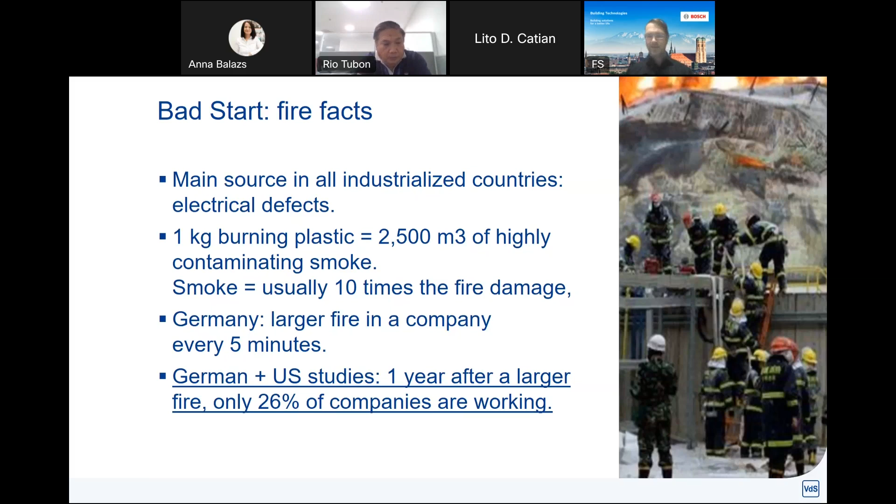Okay, we've had the bad facts. We will now also continue bad facts, but we might also say fun facts. I guess we all have read about the studies.

How are people reacting to a fire alarm? When a siren goes off, not the voice alarm, you are expecting everybody to panic and run out of the building. But the standard reaction is to do absolutely nothing. And after a while, the people say, hey, turn off this damn annoying noise. Where's that noise coming from?

And we have a nice example here of even the reaction of technicians to fire detection and alarm systems. This is a Moscow mall, or this was a Moscow mall.

In the year 2018, the fire alarm is going off, and the technician on duty says, hey, this fire detection alarm system, why is this damn annoying thing beeping and blinking at me? He's checking the cameras, of course, seeing nothing because the fire detection alarm system is working right, is going off at a very early stage.

And he says, stop this damn beeping, blinking. He turns off the fire detection alarm system. And you can see the outcome in this nice picture.

So let's say enough of these horror statistics. Please give us some good news. I do.

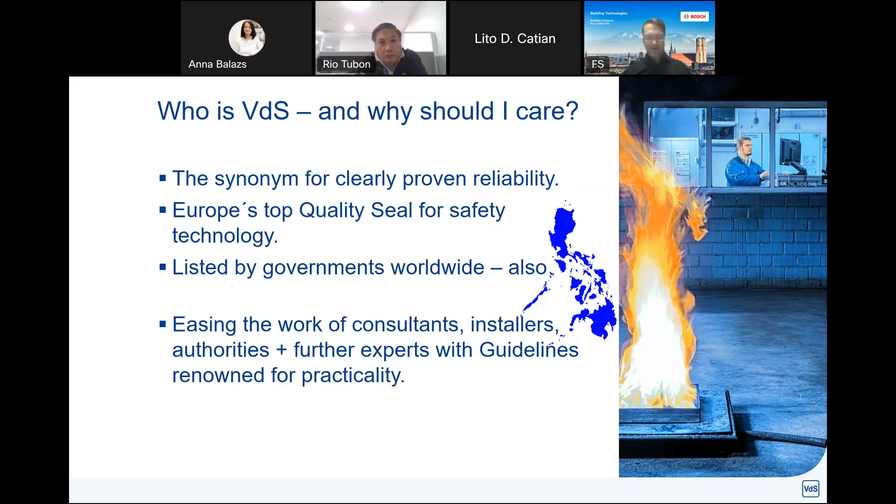You can say, okay, sounds good, but please give us some detail, give us proof. How can we be sure that VDS safely protects us? Because we are -- I have to read this because I like the slang -- evidencing supreme reliability by practical endurance specifications.

Same as, for example, Underwriters Laboratories or FM Global. The testing is subdivided into two main parts: functional testing and environmental testing.

Products and systems have to prove that they are effective at all times after artificial aging under a wide range of difficult environmental conditions, using artificial aerosols, using real fire tests, and for extinguishing systems, even in exact replicas of the planned extinguishing environment.

Basically, our job is to heavily mistreat the safety systems and then make sure if they still function. All this so you can see directly at first sight, this has VDS on it. This will save human lives and entire companies when I need it, long term, and also under any, even the toughest environmental conditions.

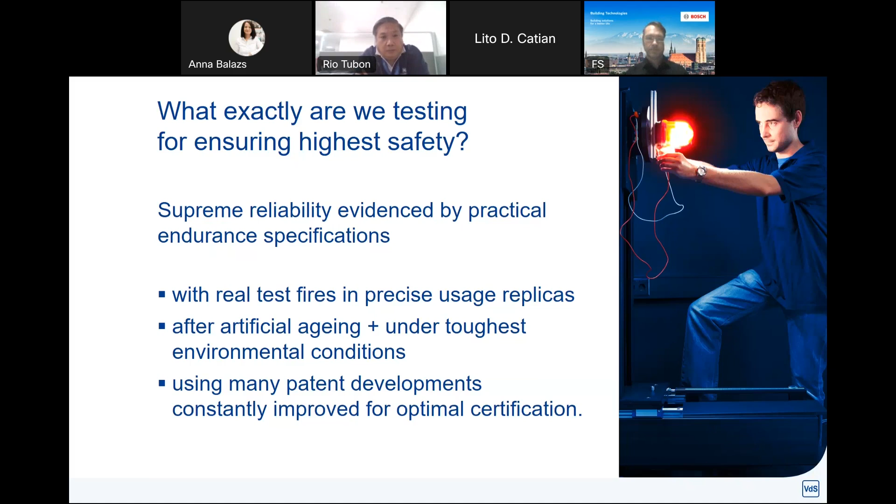We have two core points here on this slide, directly underlined for you, because there is a frequent situation that our partners, consultants, planners, installers report to us again and again. They are to install a fire protection system somewhere, and the authorities require compliance with ISO or EN standards. Then maybe the operator states, we are part of an American corporation, so our fire alarm technology must comply with NFPA requirements. And then the insurance company demands the system must be installed according to VDS guidelines. When this happens, those responsible, mostly you fine listeners, usually ask themselves the important question, why me?

Hopefully we can make your work much easier here. The VDS approved products like those of Bosch comply at all times with European standards, almost always with ISO specifications. And VDS approved products can always be used in installations according to NFPA 72. Also, if some of you are doing gas according to 2001, for this you will get written proof directly after the presentation. So with VDS, you are directly covering all relevant standards from one single source. Done.

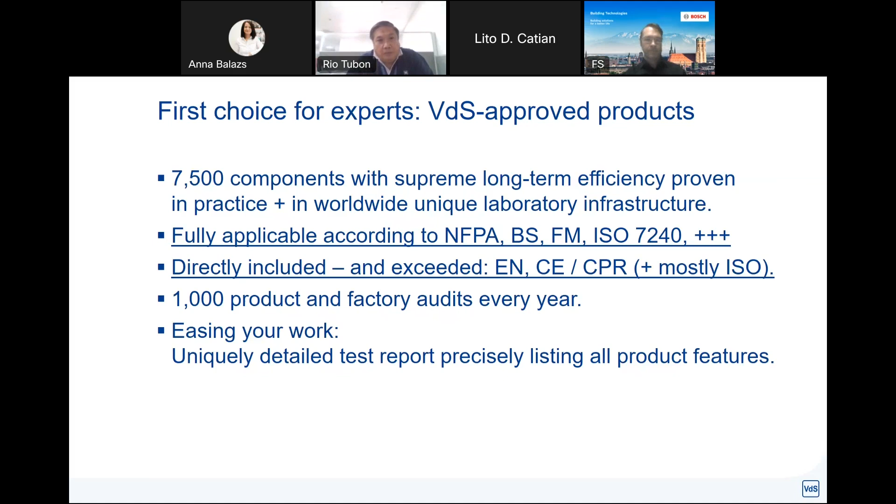VDS bases on the European norms, so I'll give you some background. In most countries, authorities, just like the company owners we talked about on the first slide, say, fire? What the heck is fire? You probably know this nice song, Fire, what the heck is fire? If they act like this, sooner or later a huge catastrophe is bound to happen, which in our European case was a fire at a mall in Brussels with 251 dead in the year 1967.

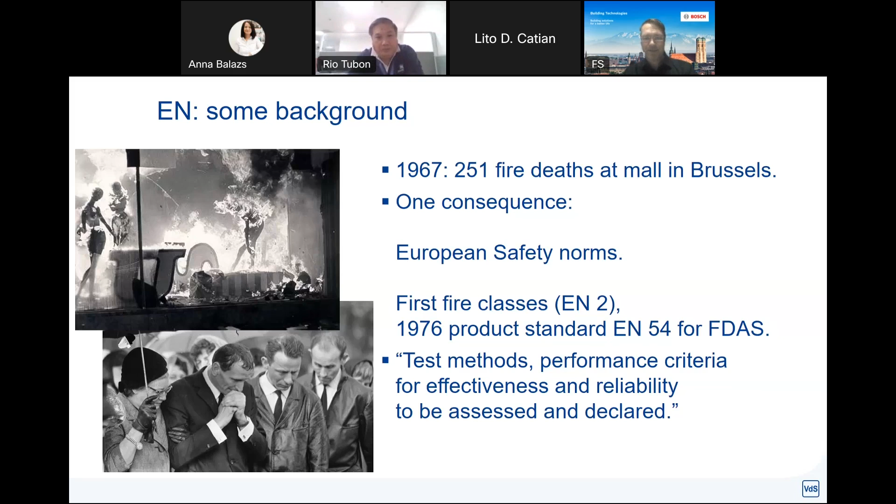After such heavy catastrophes, there's pressure from public opinion and media on the politicians, saying do something. So they had experts create safety norms, like our EN54 standards for fire detection and alarm systems, with test methods and performance criteria for effectiveness and reliability to be assessed and declared. This is a little overview showing you all the brain power that is going into the European standards.

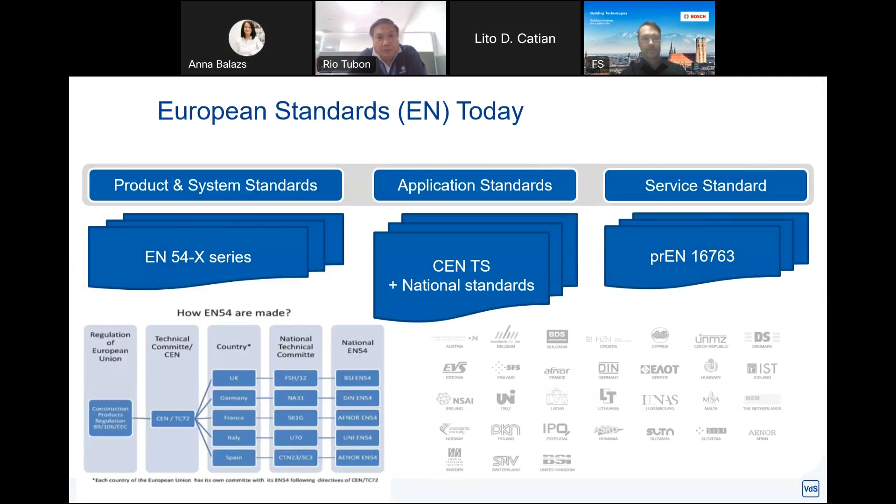Now, an important point, the comparison between the EN and UL standards for fire detection, control, and indicating equipment, CIE. Everybody first seeing this wonders, but I thought these are two totally different standards, why is that almost all the same? Basically, these standards are in constant flux. We have a nice idea, good for safety, the Americans also add that. The Americans have a nice idea, good for your safety, we also add that. Totally fine. This is a copy for global safety.

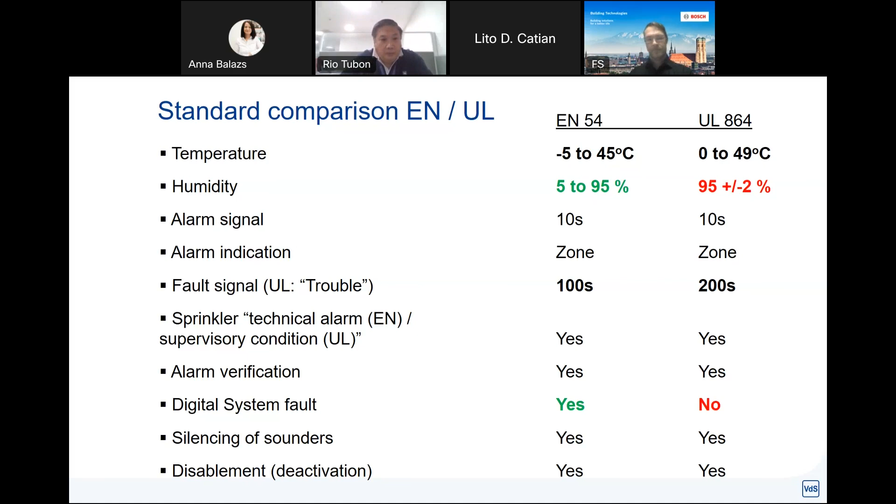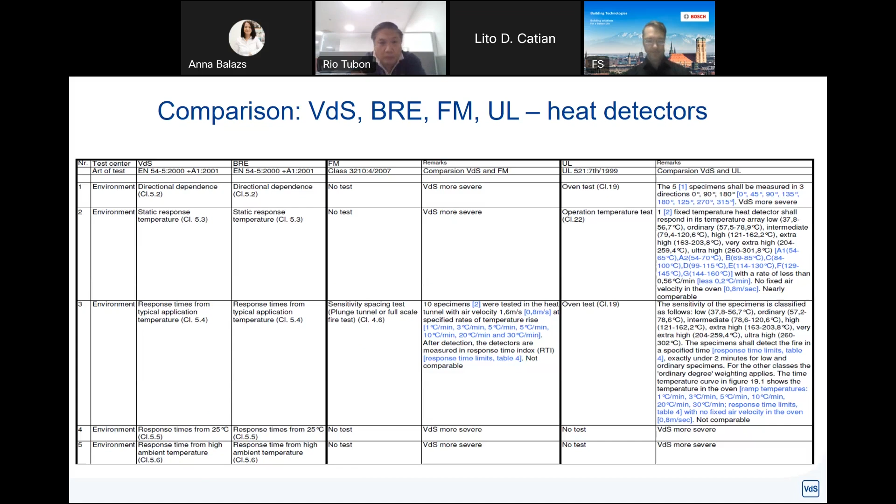Same for the smoke detectors. You see point 2, ingress of foreign bodies. When I first read this, I said, who the heck would want to ingress foreign bodies into smoke detectors? This is mostly insects, and this was one of the main triggers of false alarms in Germany during spring and summer, when loads of insects are flying around. And many Philippine regions always have German spring and summer temperatures.

As we know, the frequent false alarms caused by those reflecting insects make users hate the technology. The intrusion of bugs or other insects can be prevented by a very simple, cheap grid, and I strongly assume that in the next version, UL will reasonably demand this.

Maybe you're also interested in point 4, repeatability. We measure the testing results 6 times in a row to make absolutely sure that the detectors do not just contain a random luck generator, but that they really work. And point 6, we perform all tests with 20 detectors to make sure they all react the same way.

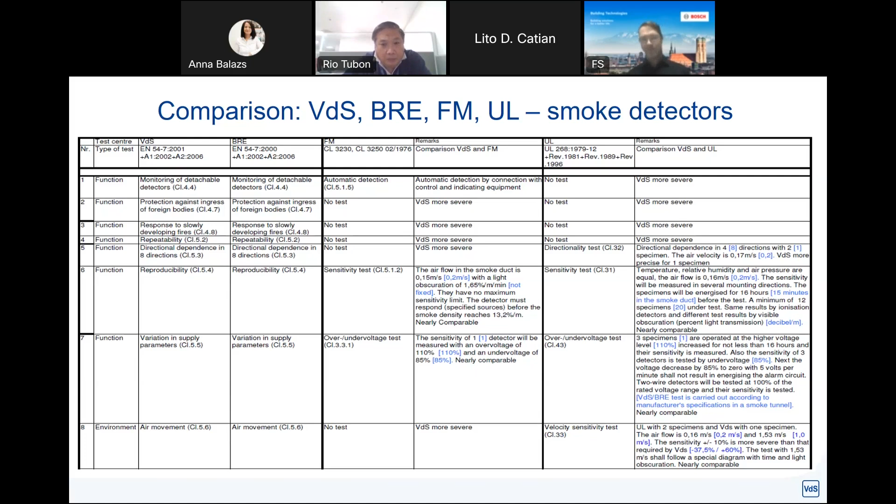I like those pictures, so I have to show you. On the left side, you see the smoke duct, which any certification institute has to buy for tests according to the European norms. It creates artificial smoke aerosols and measures exactly how many are in the air when a detector reacts. On the right, you see the wooden box in which the American institutes UL and FM are putting burning cotton cords and then counting the seconds until the detector goes off.

Another important assurance for you, and a unique selling point for VDS, is the system approval. Both the European standards and the American standards demand product testing and have planning and installation guidelines, but only the European standards are clearly demanding system testing here.

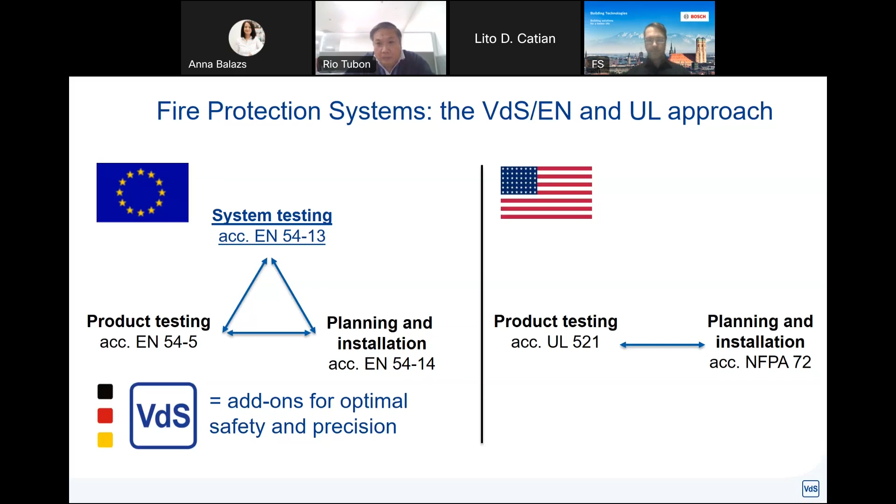And the reason for this: each of us knows the case. We have a system in which, let's say, 100 parts are installed. 99 of them are working perfectly, one is scrap. Then there is unfortunately a pretty good chance that because of this one scrap product, the entire system will not work, cannot save anyone, cannot protect any building. With VDS approved technology, this cannot happen, because we always ensure the safe functioning of all components in their interaction as a system.

Also at full capacity, like power for FDAS or the highest water pressure for extinguishers. This is why our approach is called the all-round worry-free solution by governments, consultants and other fire protection experts around the entire world. Now, if this is so important, why isn't everybody doing this? Because it's very expensive. Manufacturers change one component and you have to pay for an entire system test again. But Bosch is doing this, is paying for this, to totally ensure the proven safety of your services and your customers.

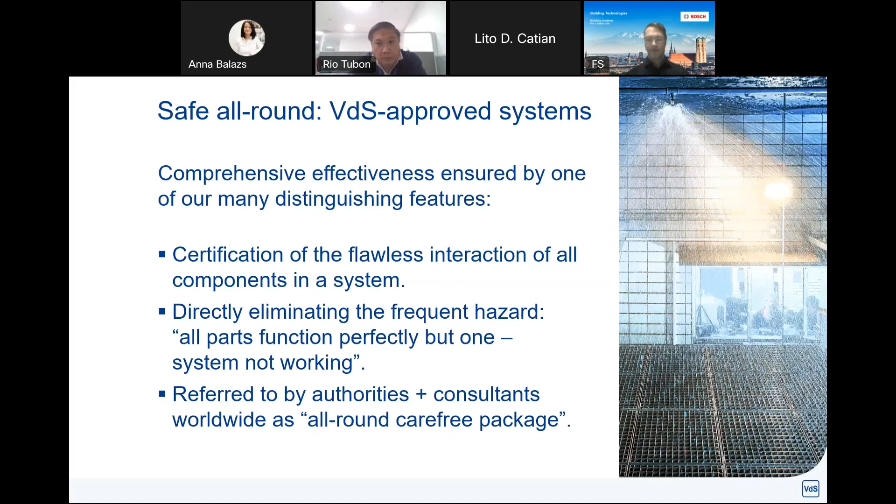Very important point because of the prominence of NFPA around the world. Since National Fire Protection Association is a US standard, people sometimes assume listed means UL listed. But NFPA by no means requires that testing and listing shall be based on an American product standard. NFPA 72 leaves this open by purpose, allowing for solutions that provide an equivalent or better safety level, as you can see on the right, which is taken from chapter 3.2.

They want to see a regular monitoring of products, of course done by VDS and any EN institute, because it's important. They want to have a competent organization accepted by authorities having jurisdiction. Yes, VDS is #1 in Europe and accepted by authorities all over the world, of course including the Philippine ones. So products approved by VDS, always also certified in accordance with the EN54 series, can be used anytime in NFPA 72 installations.

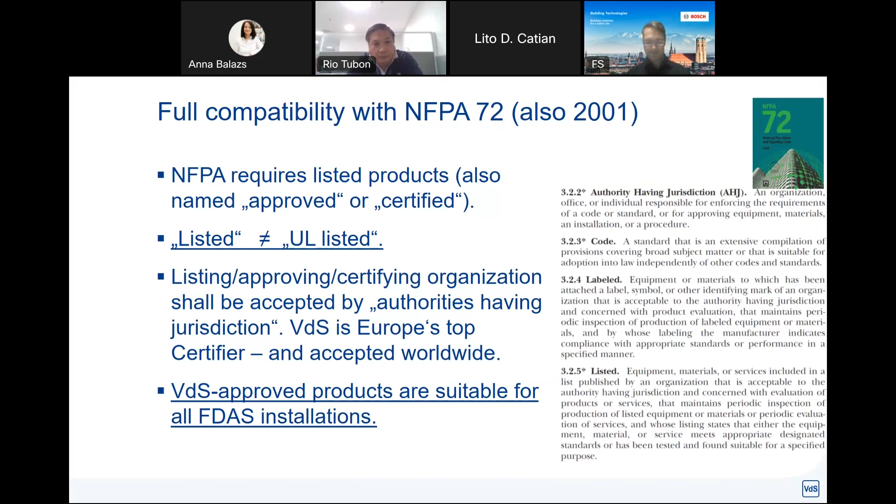Maybe good to know for you, we are state accredited, of course, for 100% independence and highest objectivity. We are backing you with unique expertise gained in more than 30,000 system inspections every year, so we know exactly where to look for finding the flaws. And our core job, our mission, is to detect any possible flaw in a complex technology immediately, and not while fire is raging when every second counts.

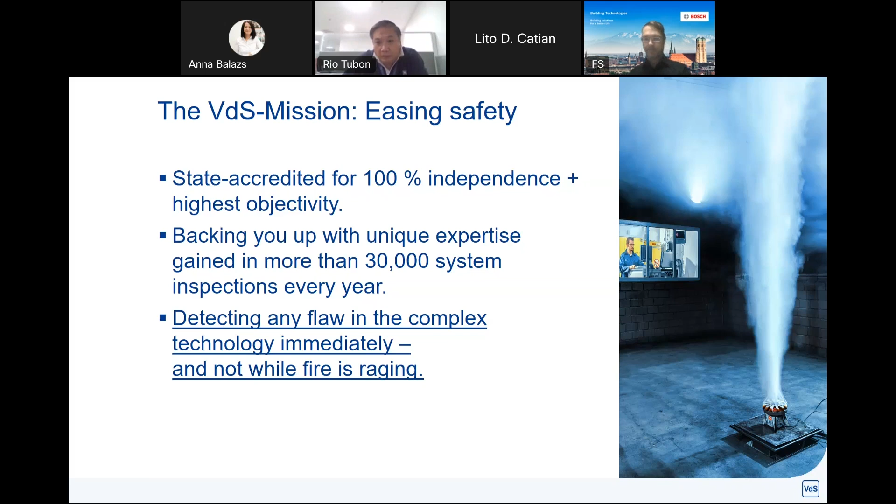Then one more thing that could be important for your work. A very big player in the safety market are the insurers. And when you are dealing with them, it could be helpful to mention that VDS was founded as the official sprinkler testing laboratory of the German insurers.

Sprinklers, because in 1908 it was the only safety technology existing, and VDS is still 100% owned by the German Insurer Association, with worldwide active members like Allianz, FM Europe or Munich Re. And of course, with annual payments for fire damage amounting up to 2 billion euros every single year in Germany alone, they keep a very close eye on fully reliable safety technology.

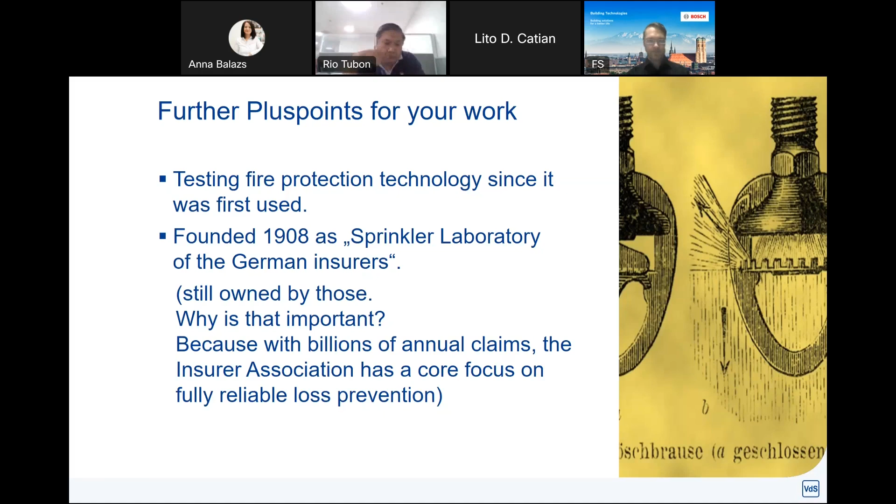Then an important work, our own standards, the VDS guidelines, which are set to ease the work of consultants, installers, and further experts with renowned practicality. And we have the guidelines for product systems, planning and installation.

Free download of all guidelines for products and systems. Unfortunately for P&I, they are charging, but I'll have some takeouts later for you. They are preferred worldwide for highest precision and reliability, also details later. They are making us very proud, named technical holy books by the Safety and Construction Press.

All the downloads at vds-shop.de/en. Why is that in italic? Unfortunately, the shop is currently being made over for the international version, so you can only download from the German version at the moment. If you are requiring some guidelines, just send me a mail, then I will send them over to you, and within the next days you will get them.

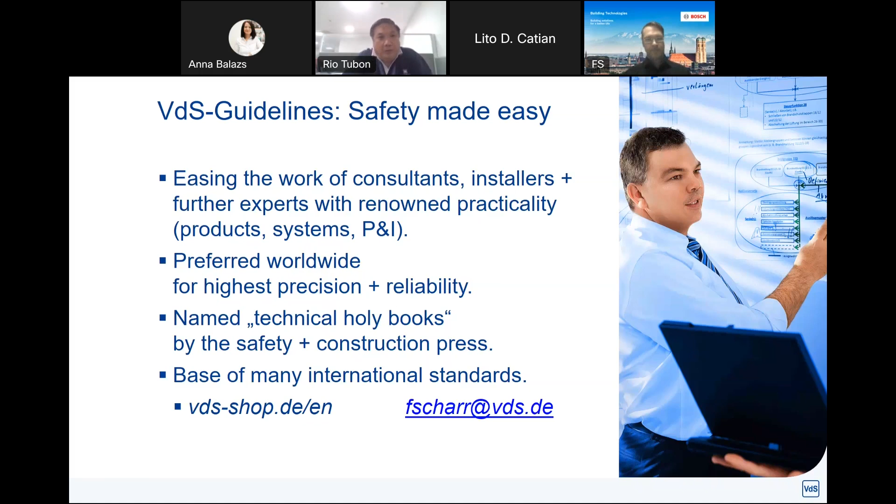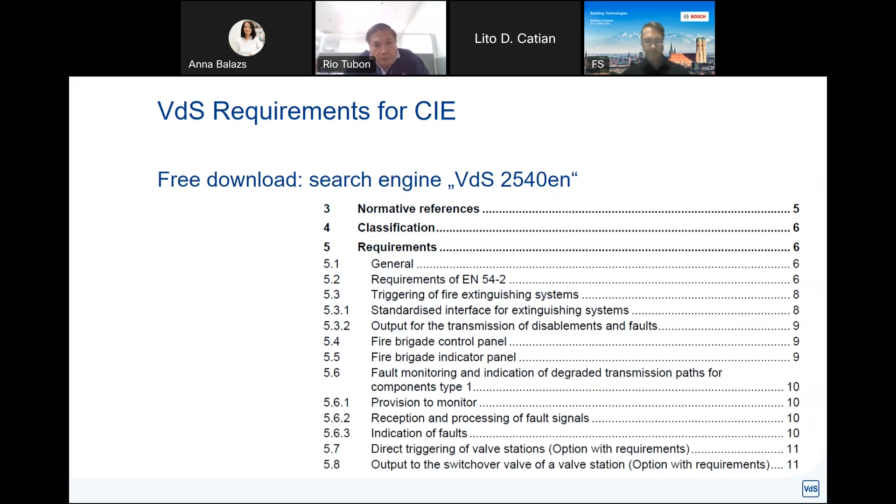So, just a little example from our product guidelines for CIE, a little summary, so you can see what Bosch systems all have to manage, all have to master for getting VdS approval. And just if anybody wants to read this later, I've taken out the example of fault monitoring.

Now, one core point, we have so many detectors. The question is always, what kind of detector shall I use? So I've added this little slide, hopefully also helpful for your work. Basically, we can say that in any standard atmosphere, we always have the standard smoke detector. This is why I put this bigger than the other ones.

What you should always look out for in the standard atmosphere, mostly offices, is places where smokers could gather. Because if smokers are gathering somewhere, say it's too far to go out, let's just go up here down the hall or somewhere in the corridor and have some cigarettes - there's danger of the smoke detector going off. So it's better to put some additional safety detectors in there.

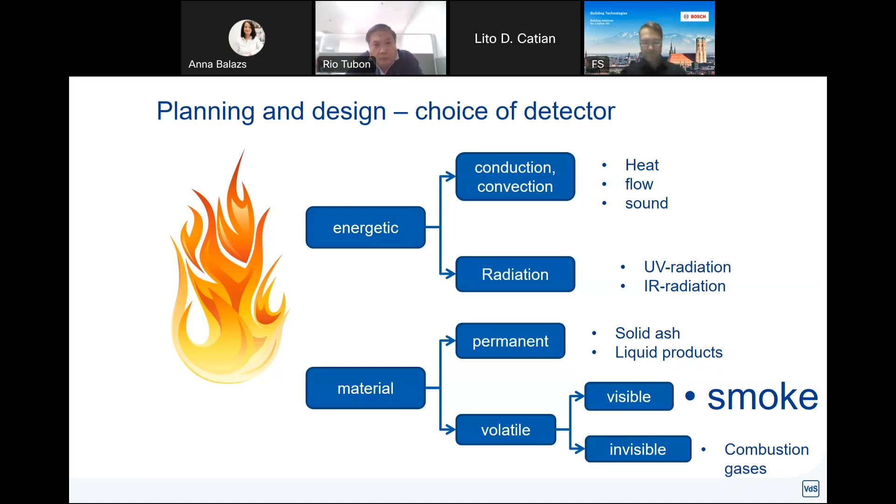And in case there is the so-called people damage, we have a nice saying here: then the judges, the authorities, they are looking definitely for somebody to crucify, and they are looking as long as it takes, no matter how long it takes, until they find anything for which they can crucify somebody. If, for example, you're looking at the earthquake in Turkey just a few days or weeks ago, it took them 5 to 6 days to get all the survivors from the collapsed buildings, but it took them only 3 days to arrest people who the authorities say are to blame for the buildings breaking down in the earthquake.

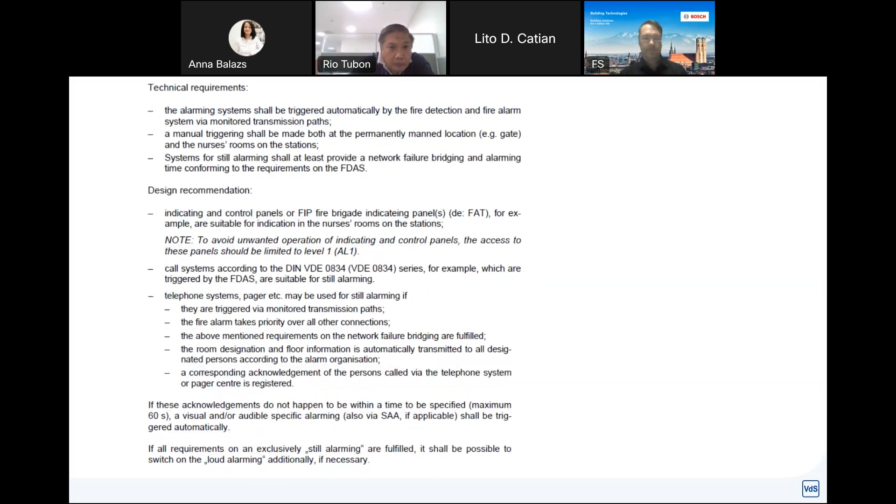Also some information on the semi-new multi-sensor detector. If anybody's interested in this, check it out after the seminar.

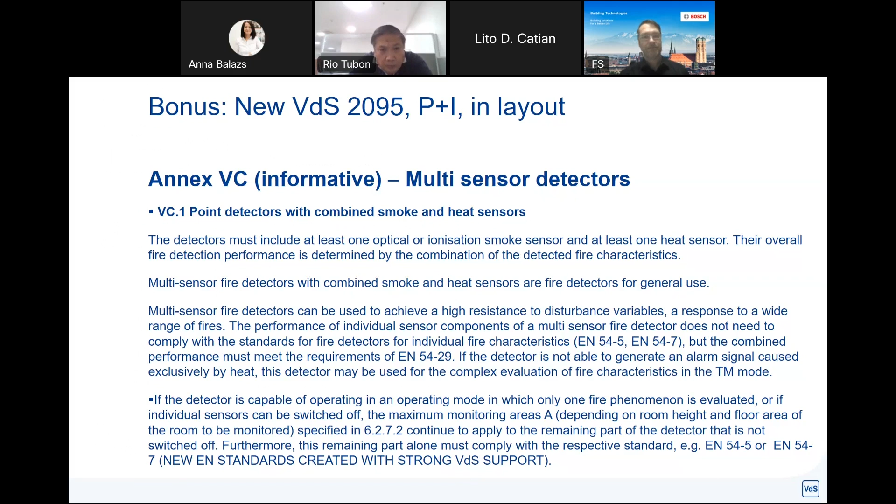It is too much detail for us here, but you may want to check out all the standard fires that Bosch technology has to go through to get VdS approval. One thing that might be important for your work is test fire number 6.

This is the so-called methylated spirit test, basically an alcohol fire burning with a lot of flame but hardly any smoke at all. Before Corona this wasn't that important to us, since not too many companies had masses of alcohol within their ranges. But when the Corona epidemic started, suddenly there were masses of disinfectants stored in almost every office, and these are mostly based on alcohol, burning with hardly any smoke, only flame.

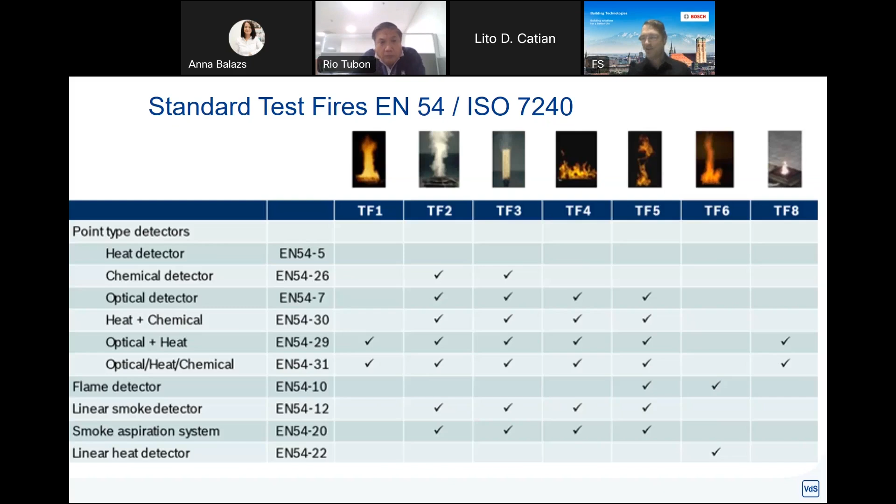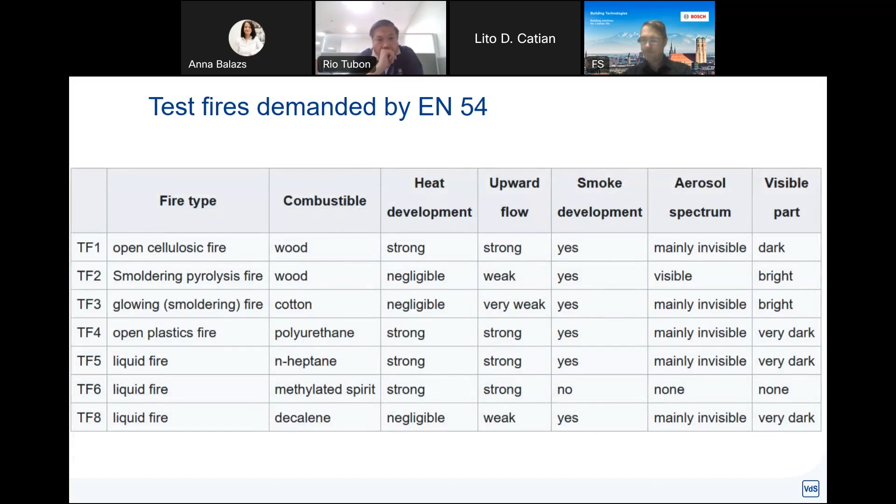Also, everybody is talking about climate change, so we are getting more and more thunderstorms, and we have a guideline on overvoltage protection. Unfortunately, at the moment it's only in German, but what I have done, I hope this is helpful for you, is summarize the core points for you. If somebody wants to check this out later after the seminar, I hope I can support you with this.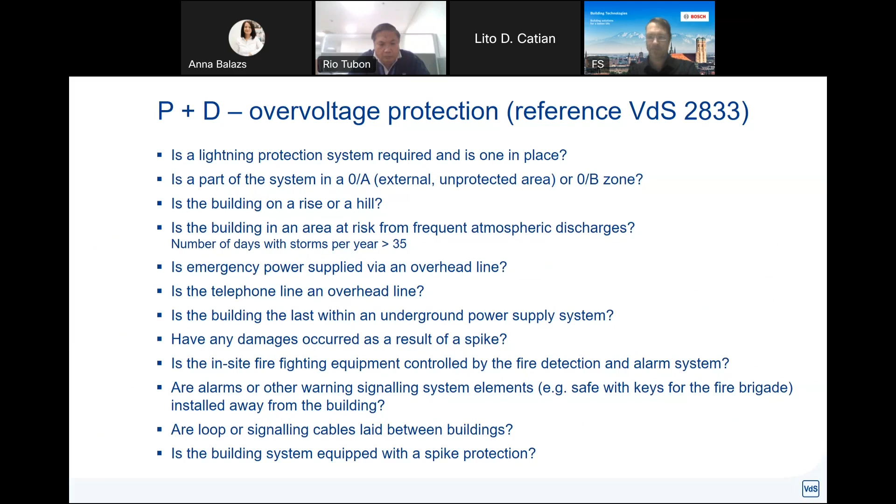The core question when it comes to fire protection technology is always: does the whole thing work? And the mission of VdS is to answer exactly this core question for you. You can tick off this highly important point and concentrate on all the other difficult planning and consulting issues you need to focus on. We are taking this very important duty off your back, because long-term reliability is made visible at first sight.

I hope this was helpful to you, to our joint cause of protecting human lives, costly properties, and the environment. If you like, check the VdS LinkedIn channel for all guideline news.